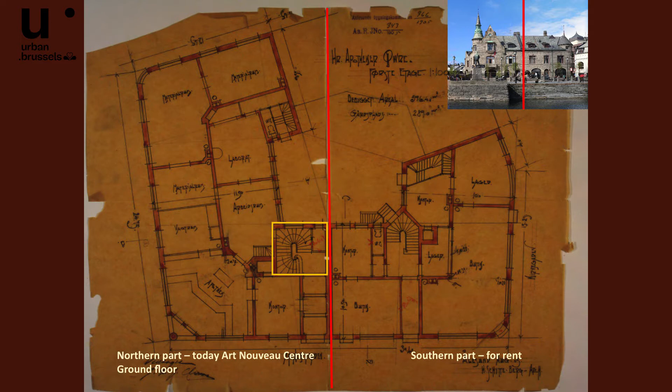The original drawing shows that the building consists in fact of two single entities. The northern part, which was designed for business premises, and which is today the Art Nouveau Center. And this is the southern part. And the southern part, which was intended to rent. There are two similar staircases in these two parts, and this one is the one I will present today.

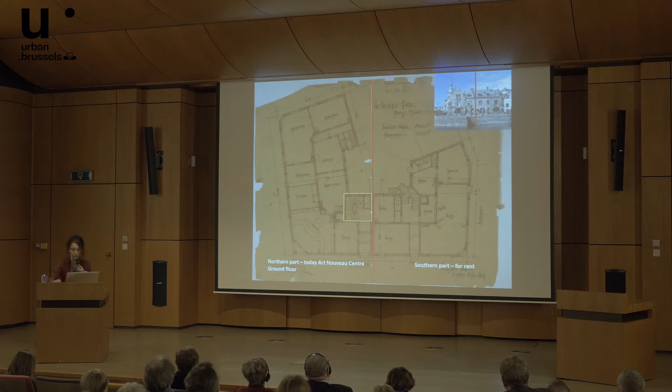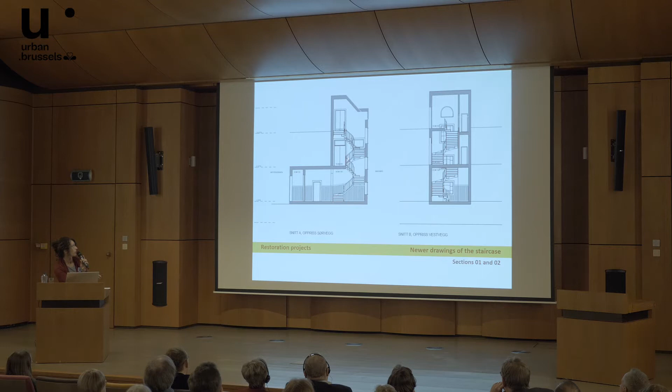Unfortunately, we couldn't find any original drawing of the staircase, and that is the reason that I have to show you newer drawings today. But here we can show the winding stairs that extend from the ground floor upwards to the first and second floor. The staircase is unique in its form and has been executed in a combination of oak, pine, and mahogany.

Oak and pine are usually materials very useful for construction elements, and here we can see them on the treads and baluster and string, while mahogany is often associated with high quality and luxury. And here we can see mahogany on the handrail and the starting newel, which is very much decorated.

From 2012, we have been facing a problem related to the staircase stability and sinking, so the project that was done in 2012 was focused on that, and was conducted in two phases that I will explain later. And last year we had to launch a new project because the problem with stability was back.

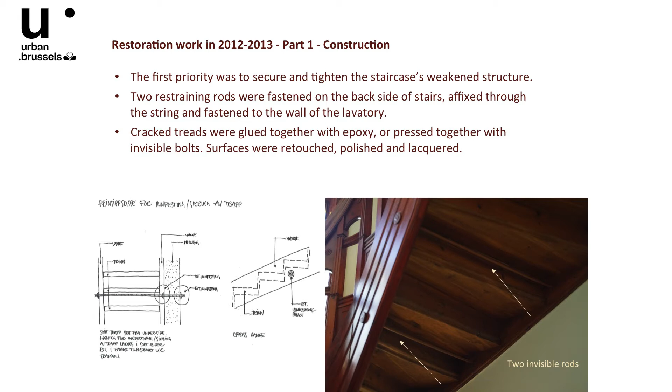The main issue was related to the sinking and the treads which glided out from the string. To solve the problem, two restraining rods had to be fastened on the back side of the staircase here, and on this side they were fastened on the string, while on the other side they were fastened on the wall of the lavatory. They are pretty much invisible because of the size of only 15 millimeters and the appropriate color that was put in it.

And here we can see also a drawing showing how it was proposed to be done.

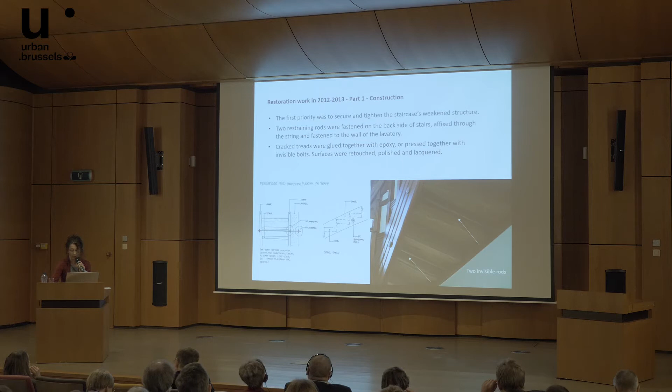Additionally, cracked treads were glued together with epoxy, and some parts were pressed together with invisible bolts that were fastened horizontally. The surfaces of the treads were retouched, polished, and lacquered.

The underside of the string were cleaned, retouched, by using the traditional shellac polish method, and then waxed.

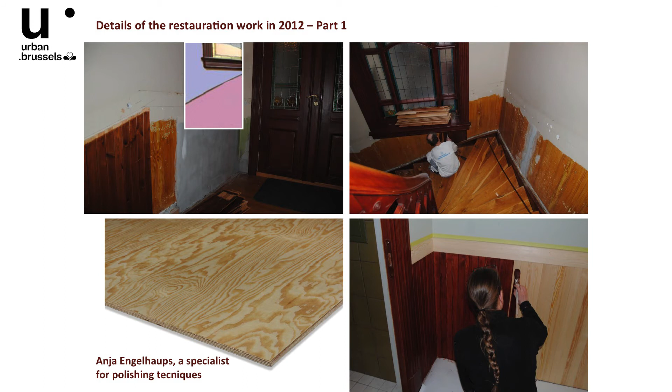Wooden panels that were put on the walls in the stairway in the 1980s were not original and therefore had to be dismantled all the way up to the second floor.

One interesting finding indicates that the wall behind the panels was originally grained. First time in a light graining glaze that imitated pine, and the second time in a graining glaze in a darker imitation of oak.

Between these two wall surfaces was also discovered a decor line in black color, about 6 millimeters wide.

Here we can see a skillful Anja who was working on the restoration of the graining and used the finest cold-pressed linseed oil, which has been supplemented with 4 pigments: burnt umber, burnt sienna, yellow ochre, and alizarin.

After the mixture had dried, the wall was treated with a similar lacquer that had been used on and applied on doors.

And two more details. Here we can see wooden panels on the landing on the first floor, above the landing on the first floor, where we can see that forms and shapes are pretty much simple and also had been used in wainscoting in the dining room.

On this picture, we can see an imitation of the wooden door that had unfortunately been sealed on this position. And this imitation is also made by graining, using only a few different painting brushes.

And of course, many other surfaces and details, such as the windows, lamps, and door handles, were repaired or replaced by historically correct copies. But unfortunately, we don't have so much time today to talk about all these details.

Phase 2 in this project was to open a wall under the staircase on the ground floor, and to recreate the stained glass window that was behind this wall.

But the so-called secret room was hiding two elements from the 1907 original: floor tiles and an original wall with coconut fibers, which was usually used as reinforcing in plaster walls at that time.

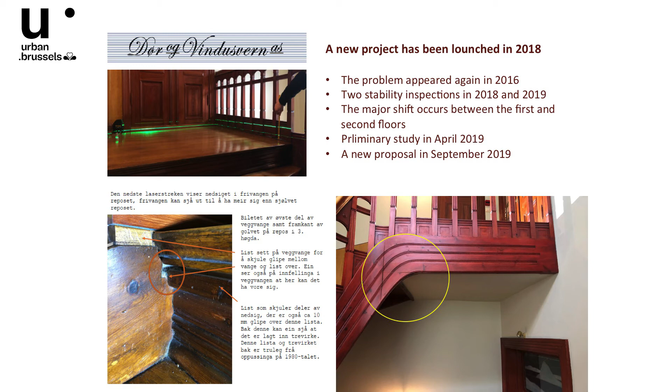But not long after the first repair, the problem with stability was back. After a few inspections, it became clear that the main issue related to the stairs sinking had not in fact been solved. The stairs are pretty much stable between ground floor and first floor, while the major shift occurs between the first and second floors.

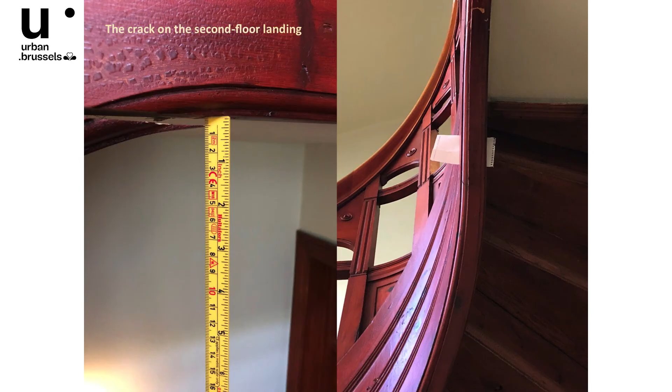From the very top, we see two different cracks in the second floor landing. During the first inspection, the size of the gap was demonstrated by inserting a sheet of paper, but a year after, the gap was much bigger, about 3 millimeters thick.

Different measurements show how much the landing and string on the second floor have sunk. We can easily see the bottom laser line that indicates the landing has sunk about 23 millimeters, while the string has sunk about 40 millimeters.

The steps are gliding out from the string, and the measurement shows a significant fall, reaching a peak of 56 millimeters on the 35th step. We think this is really an acute situation that has to be solved, improved.

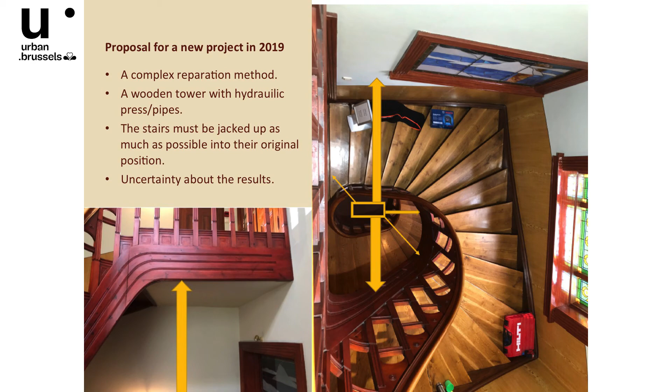The method that could secure this challenging structure sounds quite complicated. First of all, the open string must be jacked up, pressed toward the walls, and locked into a straighter position. The biggest challenge is that the structure must be pressed up at various points at the same time.

To do this, we must build a stable tower from the ground floor that extends all the way up to the second floor. The tower should have 3 points from which the string should be lifted up, and 4 points for pressing it towards the walls.

It is most likely that all this lifting and pressing needs to be done using special hydraulic pipes. Additionally, the front edge of the landing on the first floor must be used as a checking point for lifting up the landing on the second floor.

All existing bolts must be removed during this process, and afterward the new bolts must be put again in the same positions. This, of course, runs the risk of ruining parts of the stairs or walls, which might involve new restoration work or even production of new molding toward the wall, and so forth.

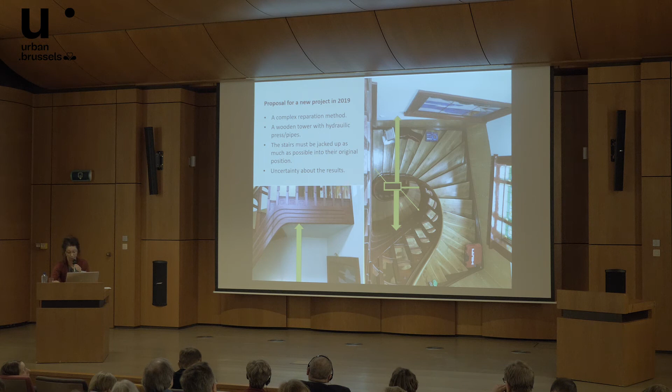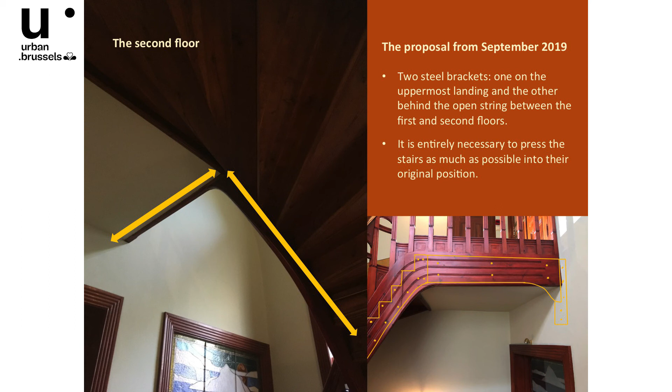This proposal also implies installation of 2 steel brackets, one on the uppermost landing on the second floor, and another behind the string between the first and second floors.

The steel bracket under the landing has to be about 10 millimeters wide, and the height will probably vary from 100 millimeters toward the wall to 40 millimeters on the other side.

The second bracket should be fixed with the first one beneath the landing, and then on the other side of the string, so as to secure the treads which are gliding out of the string.

Here we see a rough sketch from our craftsman showing how it should look.

All brackets shall be given the same color as that behind the staircase, so that they will be largely invisible. In any case, it's entirely necessary to press the stairs as much as possible into their original position before the steel brackets are affixed.